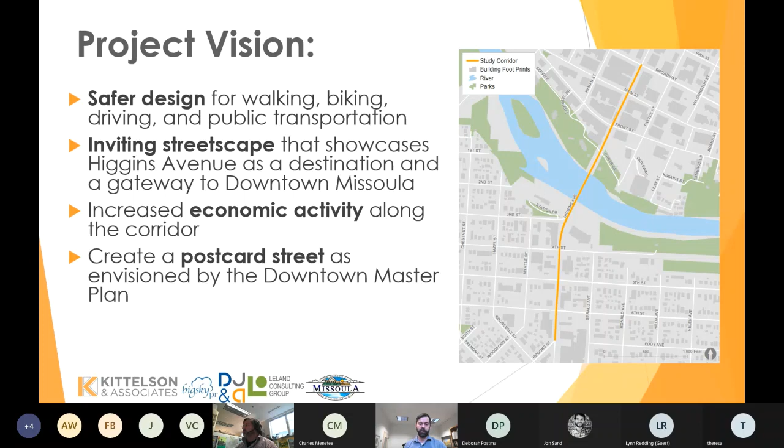So all of that to say, we want to create a space, we want to create a place, we want it to be safe, and we want it to be able to support the continued growth of Missoula. The goals that we set up for this specific project that will help us achieve that vision are first and foremost the emphasis on safety. And you'll hear me say this a lot, that safety is our highest priority when we're designing transportation corridors. So we really want the corridor to be safe regardless of how you're using it.

We want to increase the multimodal connections through the corridor. So regardless of what mode you're choosing to use, you have a facility or a way to get along Higgins and to those destinations. We really want to focus on business access and parking. Part of that economic growth and vitality is making sure that there is good access to those businesses and places to park or be downtown.

And then thinking about downtown access as a whole. So what's our future look like in terms of people accessing downtown? And then once you are downtown, how do you stay there, whether you're parking or getting on and off the bus, providing bike parking, or as a pedestrian being able to move around. So thinking about how Higgins fits into that whole system and how we're able to continue to provide a high level of access into the downtown corridor.

And again, a lot of these project goals are based in our existing plans and policies. So we have a complete streets policy in the city of Missoula that we receive direction from city council in terms of how we design our streets. We have climate goals in Missoula for both reducing our climate impacts and making sure we have a resilient system. And then we have other aspects like our economic development plans, affordable housing, all of those things influence how we look at these transportation projects and set these goals specific to an individual project.

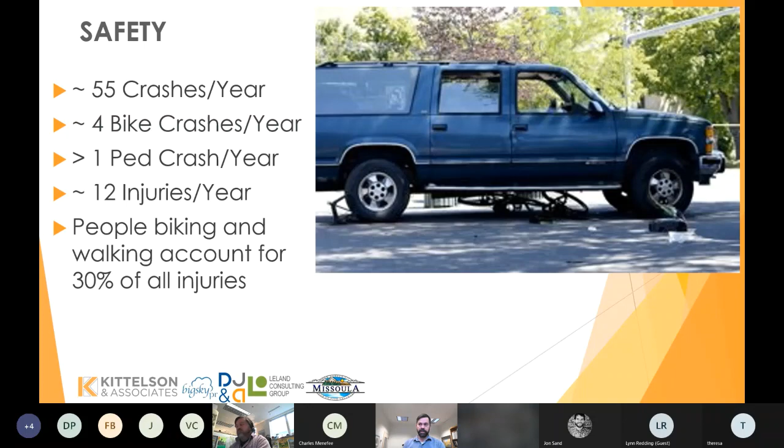And we also notice in the crash data that people biking and walking, while they're only about 10% of the overall crashes, they're 30% of all injuries. And so they're a particularly vulnerable user on this corridor. They're not necessarily as likely to be in a crash, but they are much more likely to be injured if they are involved in a crash. Those are all things that we considered in the design of this project.

We also looked at trying to address multimodal connectivity. So thinking about this corridor, not just as a way to move people through as quickly as possible, but to really make connections to the Riverfront Trail, to downtown, to the Hip Strip, to businesses. And we see a number of factors that influence that. One is the lack of left turns on the corridor is really restrictive. It serves to focus traffic as kind of a funnel that just moves people through the corridor, as opposed to being able to turn onto streets to access parking, access businesses.

We have a high stress and incomplete bike network. So we do have bike lanes on the northern portion of this project corridor, but they're in the door zone of cars. They don't get maintained. It's hard to maintain them in the winter. And then once you get over the bridge, Bear Tracks Bridge, heading south, you are put essentially right out into traffic and mixing, and it creates a lot of uncertainty and a lot of stress for everyone involved.

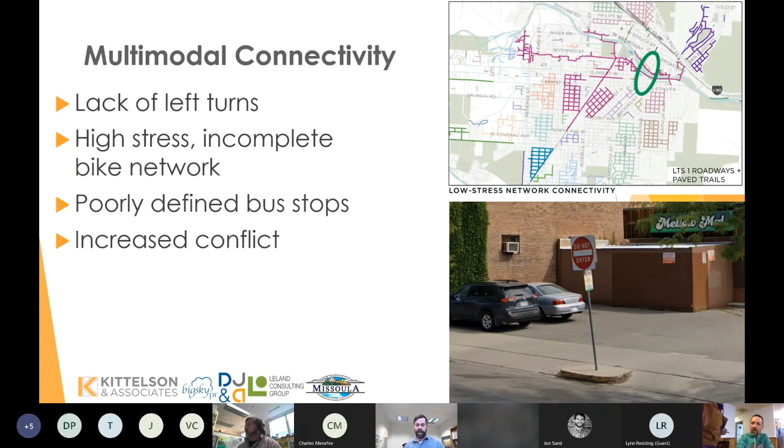And then we also have poorly defined bus stops. So some of them, like you can see in this photo here, the bus stop is essentially right at where we have 2 driveways. That's not particularly accessible or easy to find, or people don't know that it's there. And all of these things increase conflict. And when we see conflict, that leads to safety risks. It leads to higher stress for everyone, and it leads to a less efficient and less functional transportation corridor. So really thinking about the connectivity of all of the different modes and how they're getting around this corridor.

And we also see a lack of business access for people who are biking, that if you're forced to go off of Higgins to get through there, then you're not going by businesses. It's harder to access them. And they're generally going to the same places that everyone else is. So there's a lot of issues. Again, this is related to the multimodal connectivity, but we see a lot of challenges with getting access on the corridor based on the way it's designed today.

And then finally, just thinking about our sort of comprehensive view of how are people getting to downtown and what does the access look like. And the reality is, and this comes out of the work we do in our long range transportation plan, that if we continue to rely on single occupancy vehicle trips for the majority of our transportation needs, we quickly run out of capacity on all of our streets throughout the region. And that's true coming into downtown, crossing bridges, getting to other destinations around Missoula.

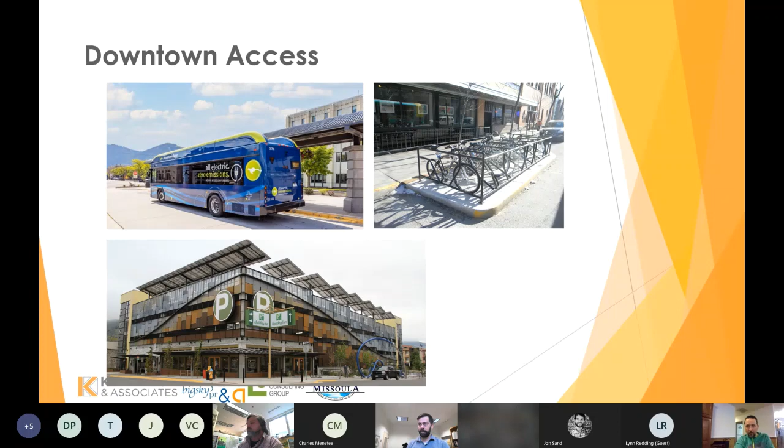So that leads us to what we call our preferred concept. Again, this is sort of what we winnowed down from the previous alternatives that we did. This doesn't mean this is what is going to happen. This just means this is what we think the best design is compared to what is there today.

And what we included in this design, it starts with a 4 to 3 lane conversion. So that's going from 2 travel lanes in each direction with no dedicated left or right turn lanes to one travel lane in each direction, but having that dedicated left turn lane to facilitate and separate out where people who are driving are going. So if you're turning left, you have a dedicated left turn arrow. We really facilitate that movement. The through lanes are just for through traffic or right turns. And so you're able to get some efficiency there in terms of just separating where vehicles are going.

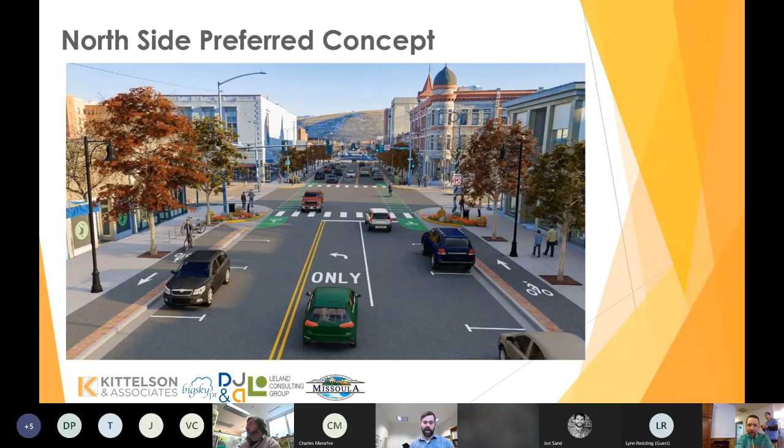This design north of the river allows us to retain all of the parking on both sides of the street. We've heard many times, and we've seen in economic analysis, that on-street parking is a really important component of good complete street design, especially in a downtown. And then we're able to get protected bike lanes, so really physically separating cyclists from the travel lanes, which creates additional safety, it creates additional predictability, and it reduces those conflicts and maintenance challenges that we see in either mixing bike traffic or maintenance of a striped bike lane in the door zone of vehicles.

South of the river, so as you go south over Bear Tracks Bridge, the design changes slightly. It's still the same general concept, but we have a little bit less right-of-way or room to work with to manage these facilities. So again, we have that same 4 to 3 lane concept that would be consistent throughout the corridor, essentially from Brooks to Broadway, and then from Broadway north to the end of Higgins. But because of that slightly narrower space, we would have to lose part of the parking on just the west side of Higgins. So the blocks between 4th and 6th, we would lose all of the on-street parking.

And just through some creative design, we're able to retain the parking between 3rd and 4th. So that's where Betty's Divine and Guild and Ciao Mambo are all located. And then that final block between 6th and Brooks, that has some challenging parking lots and access where you have Bitterroot Floral and Electric Sound and Percussion. We would be able to retain some of those parking spaces. But otherwise, the design is largely consistent between the north and the south sides of the river.

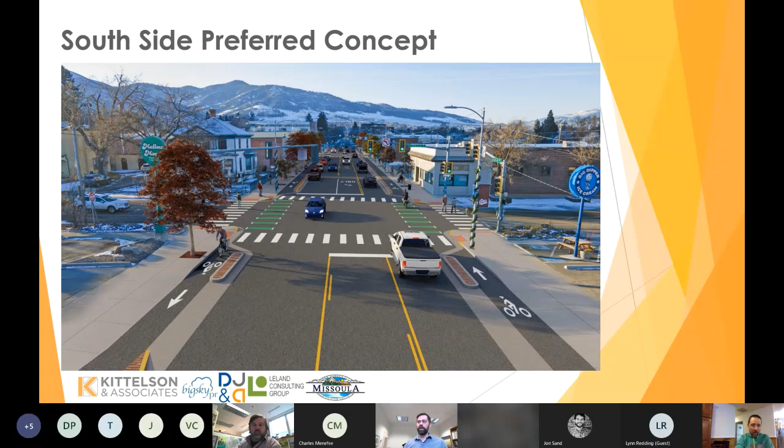So moving along, so that's the general concept. These images are renderings. There's a lot of detail that we would likely have to finesse. Don't pay too much attention to some of the specific design features. A lot of that gets ironed out in engineering. This was just a way to show more or less what it would look like in concept as you're traveling

down the corridor. So I want to go through some of what we see as the benefits of this design, and then we'll talk about some of the trade-offs. The first related to 4 to 3 conversions. I think there's a lot of technical analysis and design and research that has gone into what the benefits of a 4 to 3 conversion are. The first that we want to mention is that the reduction in vehicular capacity is not nearly as much as you would expect, going from 2 lanes of travel in each direction to 1. Part of that is because you're separating out the left turn movements, you're creating some efficiency there.

The additional width we get, we're able to standardize our lane widths. So if you think of the section through the hip strip south of the bridge, this time of year, you really only have a lane and a half because those lanes are really narrow. The parking lanes are really narrow. We heard a lot about mirrors getting clipped and side swipes, and it's just really challenging. So we're able to standardize the lane widths. That gives some added efficiency in being able to move vehicles more smoothly.

We move those left turn movements into a dedicated lane and a dedicated phase. And so you're able to move a fair amount of traffic, and these tend to work really well with the range of vehicle volumes that we see on streets like Higgins. But what really happens with a 4 to 3 lane conversion is we see a substantial increase in safety. So we see up to a 50% reduction in crashes, and that's due to left turns. You get a protected left turn at the signals. You're not having to try to shoot a gap between 2 lanes of traffic. That often leads to a lot of crashes where people will see one car, say in the left lane, but not the car in the outside right lane because of sight distances, and then you get crashes that way.

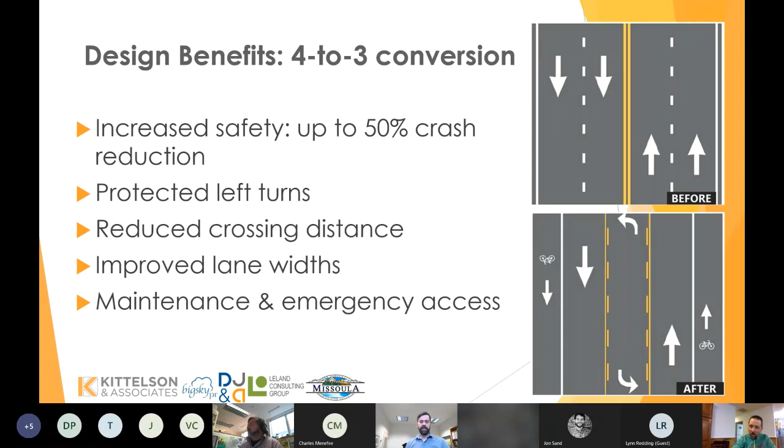this particular design. Protected bike lanes in our preferred concept are another area where we're seeing some benefit, particularly for separation of modes. So you're really getting people who are riding bikes away from traffic. It makes the cyclists feel more comfortable. It's more predictable for people who are driving. It's easier to maintain. There's really defined safety benefits of protected bike lanes. So the research has shown that, generally speaking, there's always exceptions, but the majority of the research shows that protected bike lanes increase safety, not just for cyclists, but for all the other users on the roadway as well.

And that holds up all across the country. There are also economic benefits. So in the studies, we did some economic research. As I mentioned, Leland Consulting Group, who specializes in economic and land use analysis, did some research across the country on projects just like this, where we see 4 to 3 lane conversions with protected bike lanes. And by far, the majority of those showed a net economic benefit to the surrounding business community, or at worst, sort of a neutral. There's not really much change in the economic activity. So there's some real economic benefit.

There's a lot of research on spending behavior of different types of modes, and what that generally finds is that cyclists spend less per trip, but they have more trips in which they're spending money. So they spend more overall when compared to people who are driving. And again, that's a generality, but we see that play out all across the country.

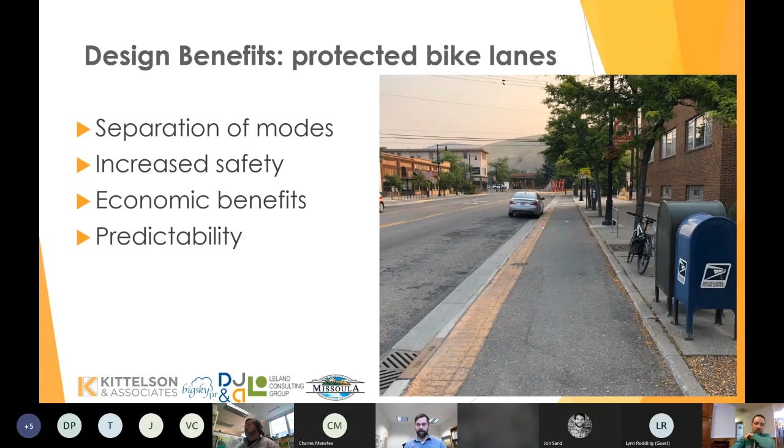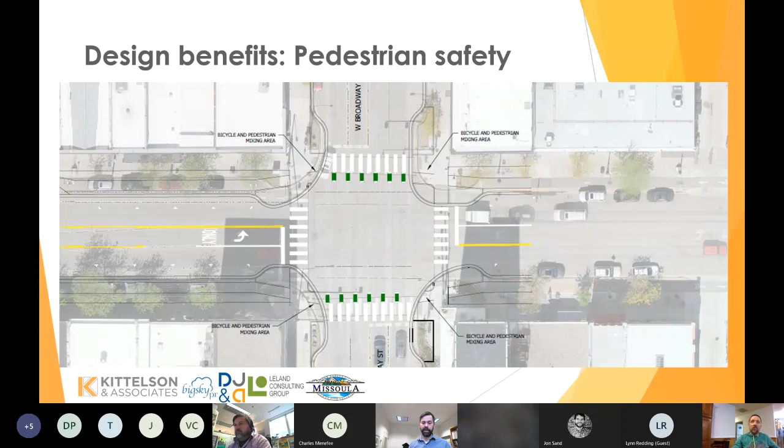And talking about benefits to pedestrians and safety, this design allows us to do some more improvements at the intersections that increase the visibility of pedestrians through doing these curb bulb outs. It shortens crossing distances, has a lot of safety, and just makes it more comfortable and convenient for pedestrians. Not to mention again, separating modes. When you provide a good bicycle facility, you get less people biking in the sidewalk, which reduces conflicts. So there's some real benefits for pedestrian safety and comfort that comes along with this design.

Transit access, we're also able to make some improvements here. One, again, the lane widths become more of a standard. Buses are typically the widest vehicle on the street, and in the current Higgins corridor, especially when you get snow like this, it really pinches things down, and buses have a really hard time navigating that traffic when they're that narrow. So we're able to get to more of a standard transit route vehicle lane, getting better parking lanes, and just making that a smoother operation for transit.

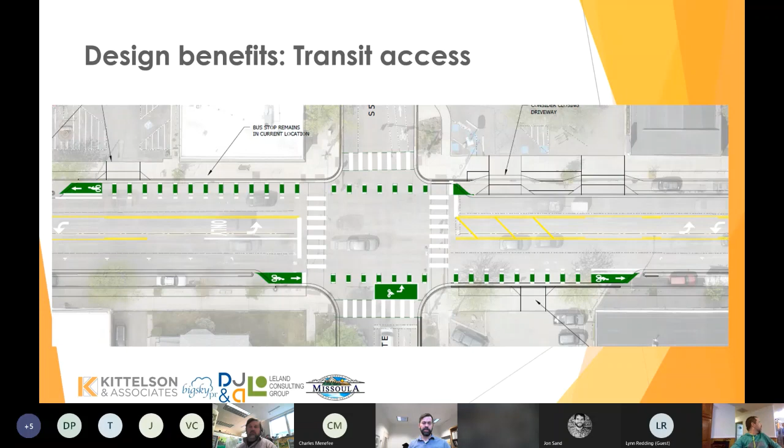And then we're able to really highlight the transit stops along this corridor. So dealing with the locations where you see today, the bus just drops you off at a driveway, trying to combine those driveways into a single approach. It gives us more room to provide an actual bus stop and put in the amenities that you would normally see, and make transit really visible on this corridor and function a little bit smoother.

And then finally, Bear Tracks Bridge. This is a question that I think there's been a lot of attention paid to, and I think a lack of good information on what this design is proposing to do and what the Bear Tracks Bridge rehabilitation project was trying to achieve. And I'll start by saying that nothing that we do in this corridor project takes away from the benefit that we get from the Bear Tracks Bridge project. We had to do that project based on the condition of the bridge. We're getting an additional 25 to 50 years of life out of that bridge.

That's a long time, and there will likely be a lot of change in our transportation system over that period of time. And regardless of what we do today, we're not proposing to change that overall capacity expansion that we got with this project. So we still have those wide shared use paths on each side. We have the deck width that we have. What we would propose, since you want the bridge to match up with the corridor on either side, is we think it would operate, again, smoothly with the 4 to 3 lane conversion. You would only need 2 travel lanes over the bridge.

So we're able to repurpose the space to add buffered bike lanes, just going over the bridge. That separates the bicyclists from the pedestrians, but still provides a good, comfortable facility for people who are biking. It also gives us some additional space in the middle of the bridge, a hatched sort of yellowed out space that would still just be bridge deck, but that would serve as area for snow storage in the winter. So you can center plow the snow. Today, when you do that, you start to really narrow down your lane widths, and then you run into issues. We would have space to store the snow, at least temporarily, before we can come and remove it.

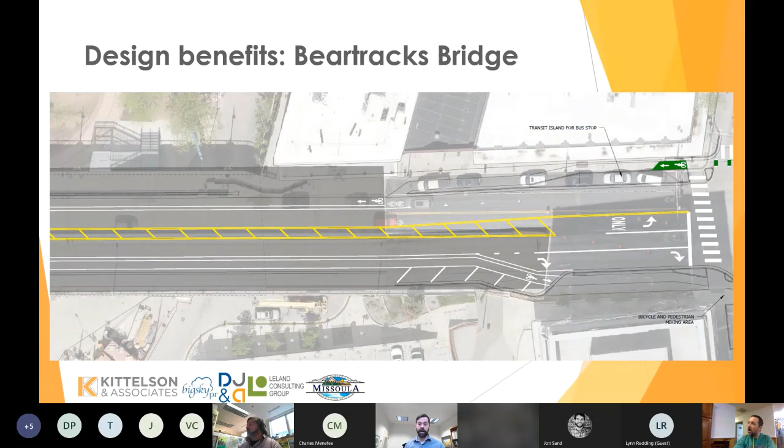So there's some opportunity to improve emergency vehicle access, provide snow storage. We're not getting rid of any of that deck capacity. So if things change in the future, either 5 or 10 or 20 years down the road, we still have that bridge investment that is going to serve us for the next 50 years. And we think that this design works for us today, and we will continue, as we do with all transportation investments, to monitor that, and we have that investment for the future.

So those are the benefits. I've talked a lot about those. Now I want to talk about some of the trade-offs. Again, we have a limited space here. We're not able to do everything in this corridor, but we think the design we have really addresses the goals that we set out for in this project in terms of safety and business access, and creating a real true complete street and a multimodal corridor that is what we would want to see in a downtown core, and would really attract people and create a place that lives up to that postcard street that we want to see.

What that means, though, is that there are some changes we need to make that are not necessarily a benefit to all functions of a street. So we see, as I mentioned, we get a lot of improvement in bicycle comfort and safety. We expect, based on all of the research and analysis that we've done and projects similar to this, that we would see a benefit to economic activity, with the caveat that there are construction impacts, and that's something we really want to focus on as we think about construction. How do we minimize those? How do we make sure that we're not creating a negative impact with construction, knowing that there's been a lot of construction on Higgins, and we know the businesses have really had to experience a lot over the last 4 or 5 years.

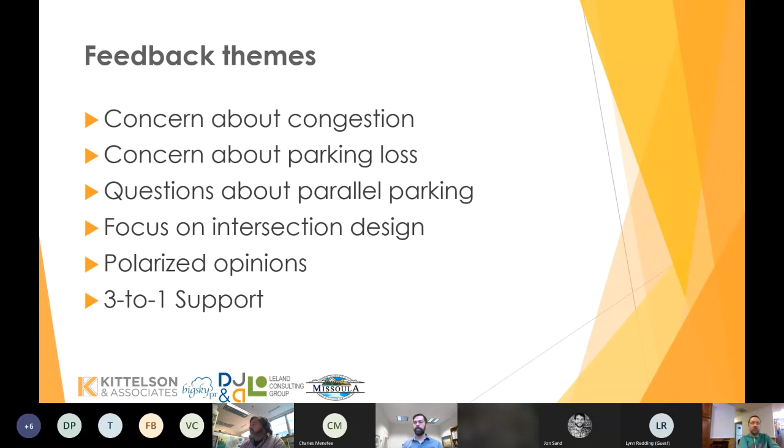So just to kind of wrap up, and I know I haven't covered everything in a ton of detail, but I want to have time for questions. We're going to continue engagement; this isn't the end of it. We're going to go into the middle of January with this outreach, then go to the Missoula City Council and the Montana Department of Transportation sometime in January or early February with all of the analysis we've done, all of the outreach, everything we've heard from people, and try to come to a decision on where our values and our goals land in terms of those trade-offs and what we're trying to accomplish with this corridor, knowing that we can't do it all. And then assuming that there's a positive momentum to move forward with changes, we would pursue funding and grants to try to pay for this project.

So primarily looking at grant funding; this is a project that should score really well with the current federal funding. But we want to make sure that there's support before we start pursuing those. And then finally, we would have the construction. If we get the funding, we want to do the construction. And there will be a lot to do there in terms of making sure that that construction has as small an impact on the business owners as possible through the corridor.

So I've just talked a lot. I thought I saw a couple of questions come in. But maybe I'll open it up now for questions or comments. And I will stop sharing this presentation. So where do we stand? Ben, are there any questions from the chat?

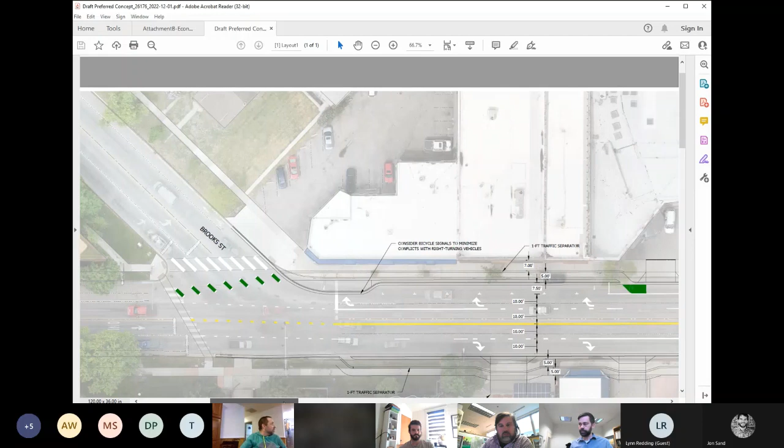And then when you have that right turn get a dedicated arrow, you would be stopping pedestrian and bike traffic. So at that intersection, here really trying to focus on, again, predictability and preventing those conflicting movements to the extent possible. And same as you get up to 6th, having either a dedicated bike phase for this signal or what we call a leading interval. So the bikes and pedestrians get the green just before vehicles do, so you're out ahead of that right turning traffic.

And just the way we can design these intersections, you increase the visibility to make sure that that's safe. So we're trying to retain the capacity, accommodate those right turning movements, but make it safe for all of the users is what we're attempting to do with this design.

Any other questions from folks who are on the meeting, not in the chat?

John Wolverton, it's more of a statement than a question, but mentioned that this is happening also alongside a potential Front/Main two-way restoration project. How are we incorporating or considering that? Yeah, we've been coordinating with the Front/Main project all along. So we've been using the same traffic analysis. We are developing designs that would accommodate both the Front/Main two-way conversion and the Higgins project. At some point, ideally these projects get constructed at the same time, so we're only doing that impact of construction once.

But we want to get the intersections right. The intersections are really where it matters. And in some ways, our preferred concept works really well with the Front/Main two-way conversion because you get those left turns now that would help just with general circulation. And we can integrate the two designs so that those intersections work safely.

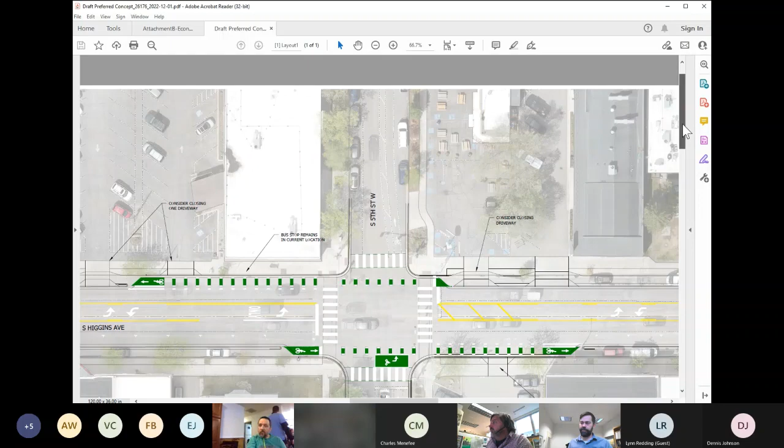Aaron, there's another question about planning at Broadway. Does it allow for pedestrian safety islands in the center of Broadway at all, where people are, that's the kind of remaining double threat? And so does this plan address that at all? No, because we're not really changing Broadway's configuration.

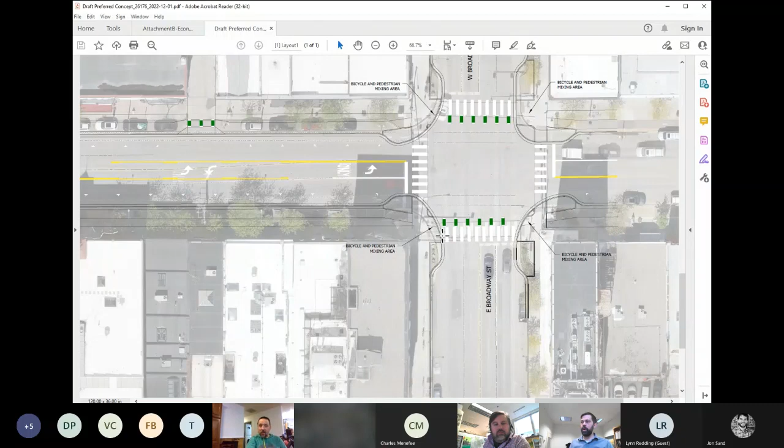So Broadway will still remain 4 lanes, but what we are doing is proposing some bulb outs, and the exact design of these will likely change as we go through engineering and really look at all of the specific details. But we think we can at least get some curb bulb outs, do more of a traditional protected intersection that then increases visibility of pedestrians and shortens that crossing distance across Higgins, and could shorten it slightly across

Broadway as well. So we're providing a better intersection and safety in terms of visibility. You would have your protected left turn still from Higgins that prevents that left turn conflict, and shorter distances.

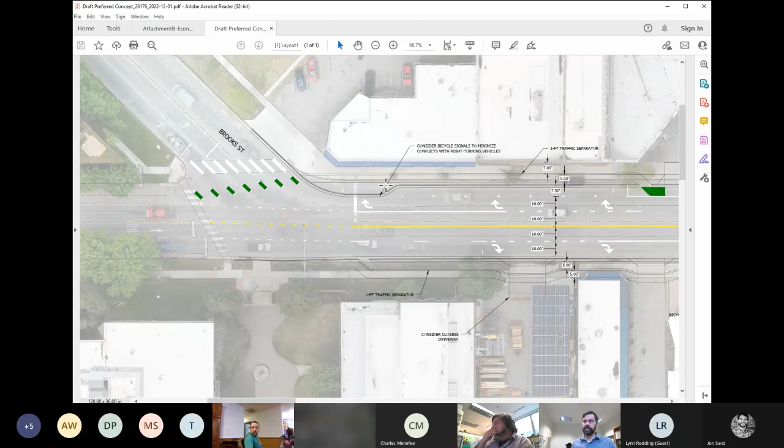Aaron, can you go back to Brooks Higgins and discuss that southbound bike movement once more? Yeah, so here's the protected bike lane as you're going south and approaching Brooks. As you come to the intersection, we would have a dedicated bicycle signal here. So as a cyclist, when that's red, you would stop, especially when that right turning movement is really being allowed.

And so then when you get the green arrow, this would either be triggered by bicyclists or you'd have a push button or something. So when you get that green signal for bikes, you would allow straight moving traffic on Higgins, but that right turn lane would have either a red arrow or a yield sign so that they're yielding to bikes and pedestrians while they have the green.

And then that would switch back to red, which would then stop pedestrians and bicyclists and then allow that right turn again. Does that describe it well? And the other nice thing is that we've got these curb bulb outs and you're just a little bit further ahead, so there should be really good visibility so that cars coming up to that intersection should really be able to see the people on bikes well.

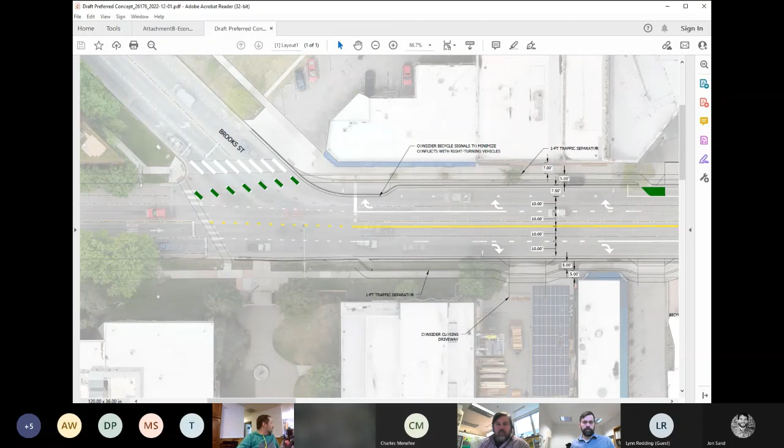We got a thank you for that clarification, so I think that you answered the question. Sure, no problem. A comment that as we get to designing that Broadway intersection, try and make sure that we don't preclude potential changes to Broadway, such as a 4 to 3 in the future. Yep.

Absolutely. There have been several comments of thanks for consideration of safety and prioritizing that. Thank you for increased safety, usable bike lanes, and full-time left turn access for cars. And thank you for considering all modes.

Another comment here: let's separate the grades between the sidewalks and the bikeways to address pedestrians wandering onto and along bikeways. Street furniture doesn't always work well. Yeah. Again, those are the kind of technical details that, if this gets approved and we are successful in finding funding for it, will come out in that level of engineering. Right now, it's a good comment that we'll keep in the full project folder, but we're not at a place to determine that.

Yeah, this is really at a conceptual stage, so there's a lot of work that would have to happen to really get the engineering down. There's stormwater, there's precise grading of all these facilities that we would try to get through as much as possible.